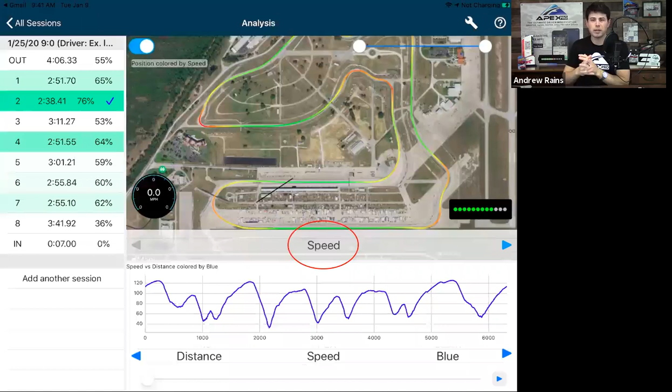But in general, when you're looking at Apex Pro stuff, and this goes for other stuff as well, red is going to be a highly negative value and green is going to be a highly positive value. So it'll go red, orange, yellow to light green to dark green. So basically, the warmer the color, the more negative the value, the cooler the color, the more positive the value. Sometimes we want highly negative numbers too, though, right? What's that? Sometimes we want highly negative numbers. Absolutely. So we'll go back to long G here.

So we're viewing where we're braking, where we're accelerating. And the main thing that we want to do for starters with the speed trace is, depending on the system that you're looking at, this might look a little different, but you definitely want to identify what your axes are. So on the bottom here, we've got distance, and I will change my indication here. So we've got a distance axis right here, starting at the start finish and driving around the track back to the start finish here on the far right.

And then right here on the left side, going from the bottom to the top here is speed. So speed is in miles per hour. In Apex Pro, distance is actually going to be in meters. Most other systems you're looking at, you're going to see distance in feet. So that's a big thing to know. We're probably going to change it to feet. If I have anything to do with it, it'll probably be feet soon, but you might be able to choose. So just stay tuned on that one.

But what we're looking at here is speed versus distance, and that's what creates the shape of this trace that we're looking at. So if the trace is accelerating, if we're going up like right here, speed would be increasing as distance increases, right? If we're going down, speed would be decreasing as distance increases, right? If it's flat, like right here, the speed is going to be relatively the same. So those are just kind of the very critical things to look at first.

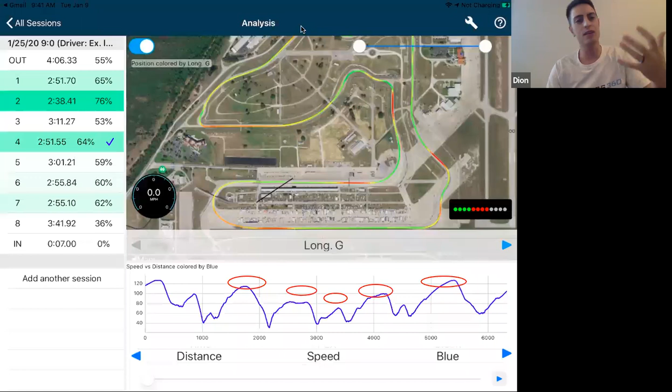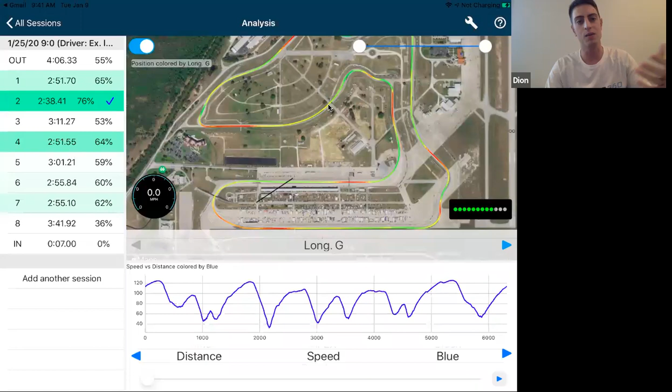I thought it might be helpful. I know Sebring well, but regardless, every time you're out there, you're finding where the track grip is. You're getting yourself up to speed. So, to take turn 7 at Sebring, and for everyone that doesn't know Sebring, that is the really big hairpin here. As you can see, big brake zone, crank it to the right.

I know in the GT3 cars, for the most part, I'm going to be braking about the 4 cone there. But in a car that I don't know, I've got a bit of an unknown. For the most part, we're all pretty decent at saying, hey, this is going to be a conservative brake zone. So my goal is to brake conservatively, but to be aggressive up to that conservative brake zone, brake hard, and then I'm going to be coming off the brakes.

And I might get off the brakes completely before I've even turned in, and I'll coast in. And now I know next lap, I can go a little bit deeper. I can go a little bit deeper.

So what can help in this situation to help you avoid the slowly releasing, where should I be going, is to try to identify by other videos, by curated onboard videos, another driver's lounge thing we do, and other things like that, where's a conservative brake zone? I'm not going to try to go up to my deep points, and this can work for new tracks, and it can work for places you know really well. Yeah. Pick that, hit it. That matters so much more.

We've all heard, like, you always have to be on the brakes or the throttle. That's BS. If you've heard that before, leave it out of your mind. Coasting's okay. We believe in coasting, especially when you've got priorities as a driver, and it puts the priority on the right fundamental, which is avoiding what we're looking at here.

Yeah. So let's just focus on the top of the speed trace. Let's look at another data session and I'll just pick one that I might be familiar with. I might not. Yeah, this will work. So let's look at the top of these. This is my data. This is from a rental car, from an undisclosed rental car company.

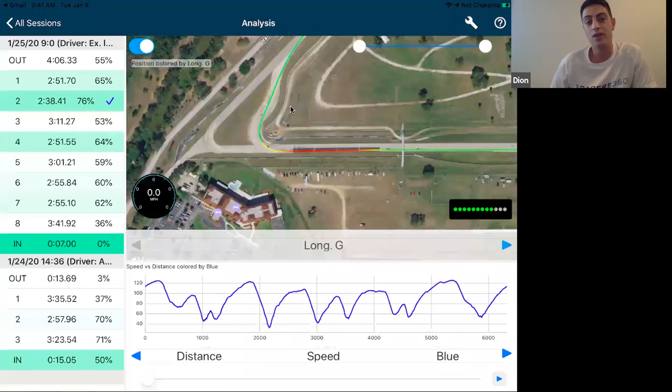Something that looks like that. And a subtle note there, if you also look at the bottom of his speed traces, they're also a little bit more angular than the other drivers. And that's often something we want to see too. Again, that one depends much more on the type of corner, but for the most part, there's a little subtle difference there. That's a nice thing to look at. Yeah, absolutely. And that's a perfect segue because that's where we're going next.

Love it. We did not plan that.

Excellent. Yeah. So for those of you who maybe didn't see what I did with the actual app itself there, I went down to this add another session option right here. And I was able to pick another session from the same track. So now I have this driver's data up here, and then I've got some of my data from my lovely rental car down here. So we can compare 2 different sessions at once, which is going to help us a lot.

But we'll go back up to this lap right here, this 238 lap, and we're going to look at the bottom of the speed trace now. So we got the top figured out. We know what the top of the speed trace is showing us.

Now let's look at the bottom. So like Dion already emphasized, the brake release is really, really key. So there's a bunch of different ways to attack this. I really like to start with a corner that we know is like a hard threshold brake, high speed to low speed style corner. Most tracks have them, almost anywhere.

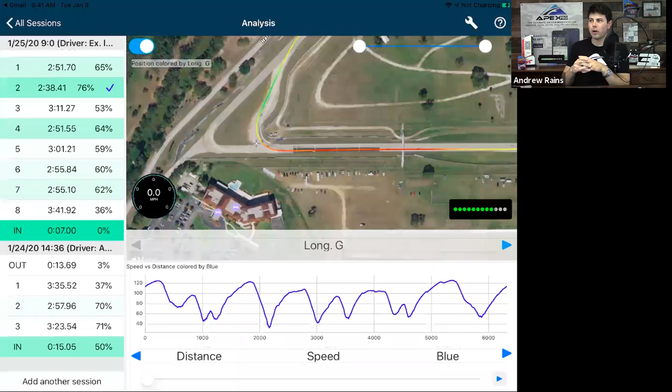If you're just thinking corners off the top of your head, entry to the keyhole at Mid-Ohio, right? Big speed on entry, slowing the car way down. Turn 10A at Road Atlanta, turn 1 at VIR. Those types of corners. And at Sebring, I'm going to look at turn 7. And especially since Dion already mentioned it, we're looking at turn 7.

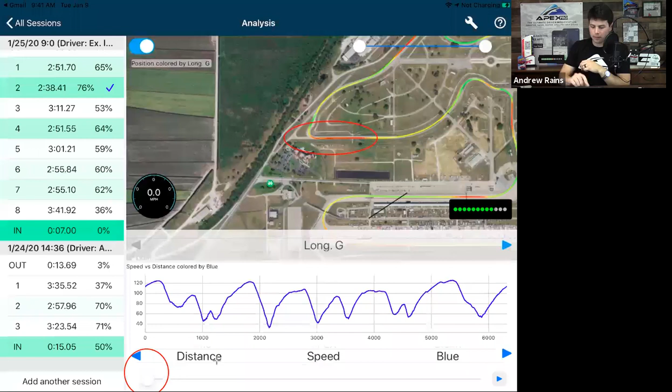So the first thing we want to do is actually determine where we are on the speed trace relative to the track. Especially when we're looking at the bottom, because the bottom is much more corner dependent, like Dion said. There's some general things that are good, but we do need to know where we are on the track to know whether or not this shape is desirable or not. So I'm going to take the slider right here in the bottom left and move it forward until the car gets to turn 7. There we go.

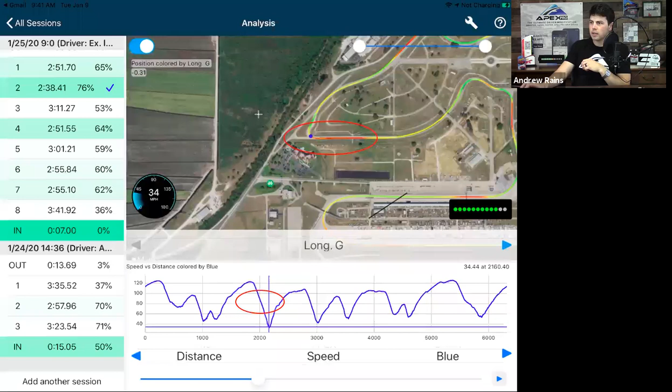Awesome. So now we can see my crosshairs here on the speed trace on the bottom is correlated to my car's location. So now we can kind of just determine that this trough right here, this base of the speed trace, is going to be the apex at turn 7. And this is a really slow corner. We're looking at 34 miles an hour right here at the base of the corner, right? 34 miles per hour is our minimum corner speed for this driver.

What we need to know about the speed trace here is anytime we have a big old gap like this where we're going from high speed to low speed, we want the speed trace to look like a V. For those of you that have been tuned into some of this data discussion before, you've heard a lot about U's and V's. This is titled low-hanging fruit, so that's why we're focused on this. This is the easiest way to identify low-hanging fruit.

If you're looking at this speed trace right here for turn 7, and it looks like a big old U, like that, right, then immediately there's a problem there. You're probably slowing down way too much, way too early. Maybe you're braking all the way down the straightaway. Maybe you got into traffic, and there's all sorts of reasons, but we want to just go to that threshold brake corner and establish what shape it looks like. We're not even saying, hey, could we go faster or not? We're not there yet. We're just going, is the shape the right shape?

And then for other corners on the speed trace that have a similar speed, meaning they're at a similar place on the speed graph. So let's see what that looks like. If you just draw a line, this is 34 miles per hour, right? Where this blue line goes right here, look at the other places that are close to that line, the other valleys or the troughs of the speed trace, and make sure those are V's as well. And if they're not, go ahead and look into that. Why is it not a V? All right, and we can talk a little bit about how to analyze that. But before we do that, let's talk about faster corners.

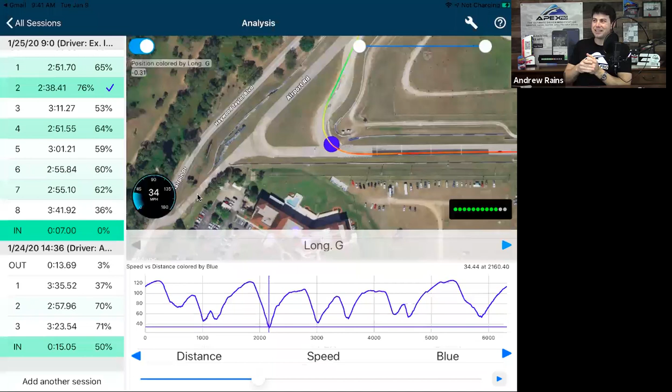And it was funny. I was on one of the webinars that's on the Racers360 platform.

I was actually going through it. One of our coaches, Nelson Mason, did one on how to learn a racetrack. And I think what's really important, where a lot of amateur racers go wrong, and it sounds really simple, but a lot of us don't, is understanding and going through a track and knowing what our priorities are in this corner. And if you look at turn 7, there's really 2 priorities in turn 7.

One, maximizing time on full throttle into the brake zone. And then 2, how early can I get back to full throttle after the apex? If you focus on those 2 things, it's going to naturally form a V. Now, there's subtleties around that. And I feel like by choosing your priority, it's going to customize this a little bit more.

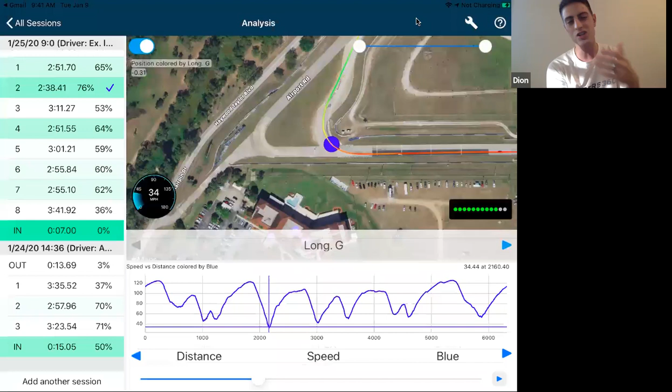So like at Sebring, to expand on what you're talking about before, turn 3 is kind of one of those more medium corners. Now, I think the speeds can be a lot lower than what you're looking at, but that's a corner where I think I want a little bit more of a U shape versus like a turn 7. Or then turn 1 is definitely more of a U shape.

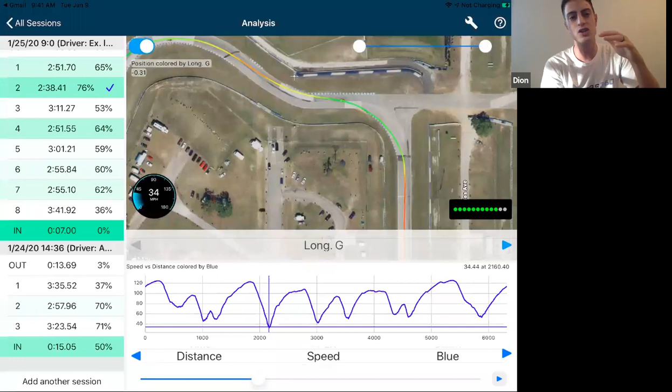And I think turn 1 is actually a really fast corner, but it's one where it's really difficult, like you said, because it's easy to roll in too much entry speed and not pick up the throttle, or vice versa. So I think turn 1 is that right-in-the-middle type of corner that's got a lot of entry speed, where you need to get back to full throttle. It's tough to find that right happy medium.

Yeah, absolutely. Turn 1 at Sebring, for folks that haven't been there, is this corner right here that we're looking at. It's more than 90 degrees, but it's also really high speed. So this driver, you can see turn one is this base of the speed trace right here, high 70s mile per hour minimum speed. Let's look at the rental car speed here, right? Actually a little bit quicker, almost 80 miles an hour right through here. I think my minimum speed was like 76 or 78 miles per hour.

And Dion, what's funny about you mentioning that, if you go to the very next lap here, you'll notice that I actually went 4 off right here at the exit of 1 through the dirt in the rental car. More time. That's right. I emphasized entry speed too much. And you can see where my minimum speed here was really good. It was really high, right?

It was higher than the lap before. If I overlay the two of them, it was actually higher than the lap before, just subtly. But then I wasn't able to get to the throttle because I was trying to gather the car up on the exit. So it's all about priority. So turn one's a great example of a fast corner.

And we'll go back to just a single lap being displayed here and talk about the shape of a faster corner. And I noticed in the comments, some folks were mentioning throttle and brake trace and stuff like that. And that's going to tell you a lot more information. But what I'll challenge you with is a quote that I think was from Spider-Man: with great power comes great responsibility.

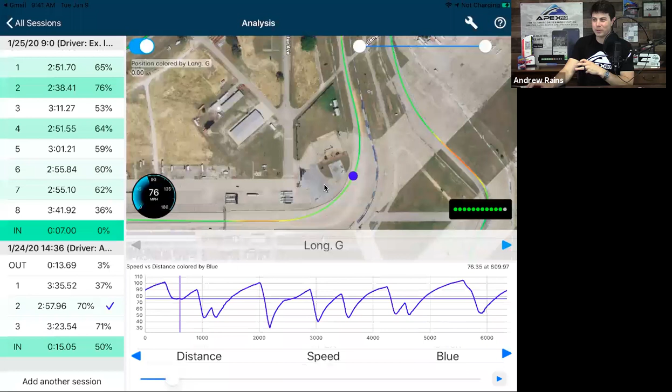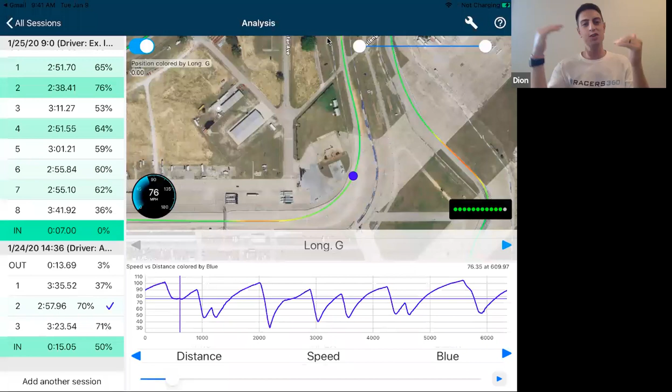If you go into a really fast corner and brake hard and late and carry all that weight over the nose, when you go to ask the car to turn, it's going to be really eager to turn in most situations. And that can spell trouble. If you carry a lot of brake pressure into turn one at Sebring and you braked really late and stuffed all that weight over the nose, you can definitely point the car right at the inside wall. And just to hopefully not complicate things, as with anything in this sport, there's happy mediums, right?

The other thing that we see a lot, and is very typical in amateur racing that we like to avoid at almost any cost, is like a flat bottom on the slope of that line. In a corner like this, you don't want a V, but you also never want to see a flat bottom once you're comfortable. I mean, look, when I go out for Sebring turn one the first time, I'm going to have a flat bottom because I'm getting up to speed. But on your fast laps, you always want a nice kind of slow, and then it should almost immediately start ticking up again. We want to avoid that kind of maintenance.

And this one, I just pointed out because I saw a little bit of that. And of course, hope that wasn't you in the rental car first lap, but it's something that we see quite a lot. Yeah, no, this is exactly what was going on here. So obviously it looks more like a U than a V, so that's good. But what I was doing here is I was actually turning in really early. And I noticed that from data I have mentally from the track, but also if I go and look at my track map reference and where I actually need to be turning in, I just wasn't calibrated to the track.

And so I ended up coasting for longer than I really needed to in the middle of the corner, because evidenced by the very next lap, if I turned in the same place with more speed, I was going to run off the track, and I did. So I actually ended up adjusting my turn-in point, and everything was better. And then my speed trace started to look more like a U. So think about those fast corners. That's a really good example.

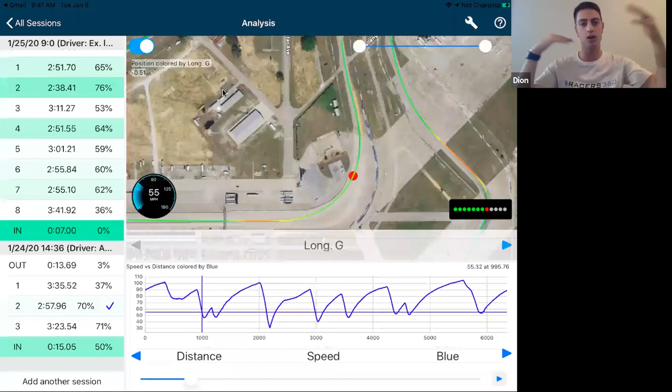So the next thing that we're going to look at is some data that I sent, and it's from Barber Motorsports Park. So you can either search for Barber, or you can look at the track selection here if you're in your app, if you've already uploaded the data into your app. If you haven't, then go to find this file. It's going to be called example 2. Look at longitudinal G. This file right here that my mouse is over, right there. And so we're going to tap that, and we're going to look at longitudinal G forces for this one.

We're going to depart from the speed trace briefly, and we're going to talk about what is longitudinal G and what are we looking for specifically in our data to note what we're doing right, what we're doing incorrectly. And longitudinal G is going to be really, really representative of our braking habits. And I say habits because driving is the type of thing, and the reason that Racers360 exists, the reason Apex Pro exists, is because it's a coaching opportunity, right? These are not things we can go out and fix immediately. So we're going to be looking at some habits here.

And this particular driver has a pretty bad habit that we want to make sure that we identify and get rid of. So we've already got long G displayed on the track map on the top here with our channel selector. Let's also go down here to this middle selection where we see speed and pick longitudinal G as well. So that's going to change the shape drastically of this trace that we see down here, this graph. Same measurement down here. We have distance over the course of the track, 1,000, 2,000, 3,000 meters. But now going up the y-axis here, we have longitudinal G-forces.

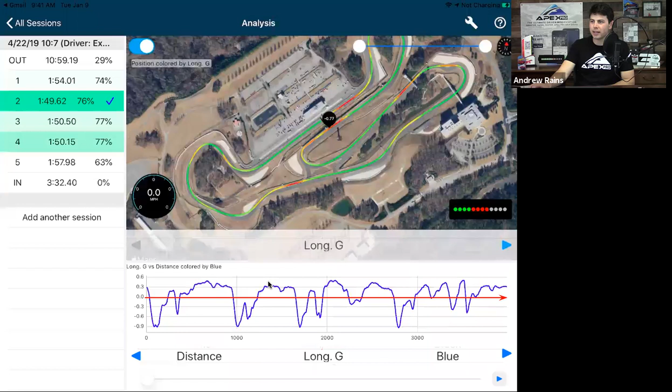Did we get an answer on that one? Someone guessed coasting. All right, not quite. Let's wait for another one. We're not going to give it away. This is not the speed trace. The next answer we got was maintenance. That technically can be, but I don't think that's really what we're looking at here either. Nope. If we're trying to identify, I'll give a little bit more information, where on the racetrack is this flat part of the longitudinal G trace, what would the driver be doing? No. So I'll tell you what I'm thinking. Not riding the rev limiter either.

So when you get close to the top speed of the car, your acceleration is dying down. So I'd say that driver is still probably flat out, but it's not accelerating as hard. Yep. So you see it come closer to zero. Yeah, absolutely. So we have to take a switch in our brain and flip it from speed to G-forces, which are two different things. G-forces represent acceleration. Speed represents the speed the car is traveling. So as speed increases, acceleration decreases.

There might be a few exceptions to that, especially with boost by gear on modern hypercars, supercars. McLaren does it. They actually add torque as the gear increases. So there's more torque in second than first, more torque in third. And some of those cars actually accelerate harder in a higher gear. I can tell you right now, this is a Camaro. This isn't a McLaren. So that's not the case. Anytime we see this flat line, that's usually wide open throttle. And you can usually identify that because you'll see an increase and then you'll see it kind of flatten at the top and then you'll see a decrease.

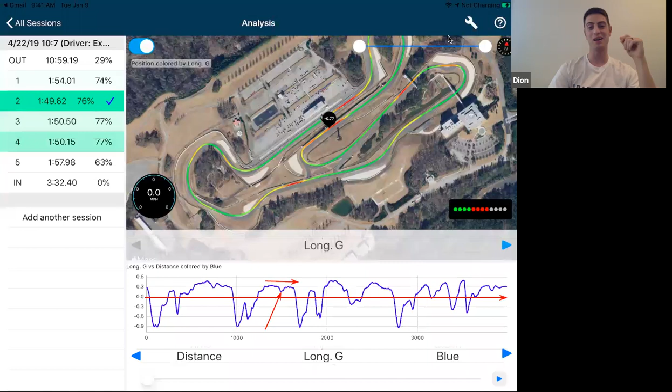We'll also sometimes see these little divots right here, right? I see one right there. I see one right there. They look kind of similar. Maybe I see one right there that looks a little similar. Let's make that another question. What are these divots? That's the best word I can come up with. Oh, did we get one? They're on it. Gear change, shifting. Nailed it.

Nailed it. Awesome. And that's easy to look at in the longitudinal G trace, because I like to actually physically look through the trace and put my body through what the car's going through. So if I'm looking at one of those divots, I'm wide open throttle. The weight's kind of mostly rearward, but it's pretty neutral. And when I shift, I go boom, right? Especially with 3 pedals and a stick shift. Even in most shiftable automatic transmissions, you're going to see that in your longitudinal G trace.

Some dual clutch transmissions, if you're driving a Ferrari or a PDK Porsche, that's going to be much less significant. It might not even be visible in the longitudinal G trace. It's definitely not visible in the speed trace.

So now that we have our flip switched in our brain for G's as opposed to speed, this should make this process simpler. So again, I'm going to go to a corner on the track, and it's going to be turn 5 for those of you that are familiar with Barber. For those of you not familiar with Barber, think any high-speed to low-speed threshold braking corner.

So we just talked about turn 7 at Sebring, Dion. We just talked about 10A at Road Atlanta, the keyhole, entry to the keyhole, which would be turn 2 at Mid-Ohio if you're on the pro course. Turn 1 at Watkins Glen is going to be a pretty hard brake. Anywhere that's like, throwing the weight over the nose, toss the anchor out the rear to slow the car down, deploy the parachute, whatever it is. That's what we want to look at here.

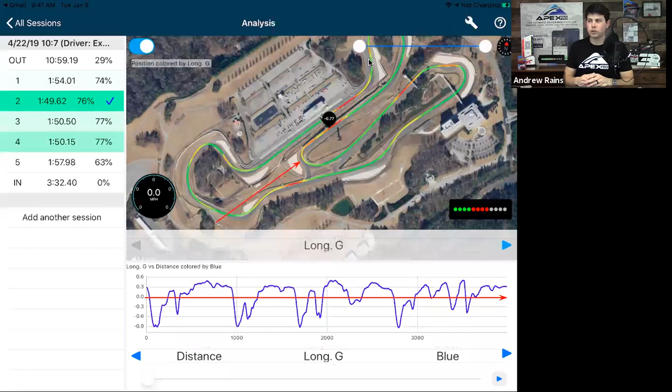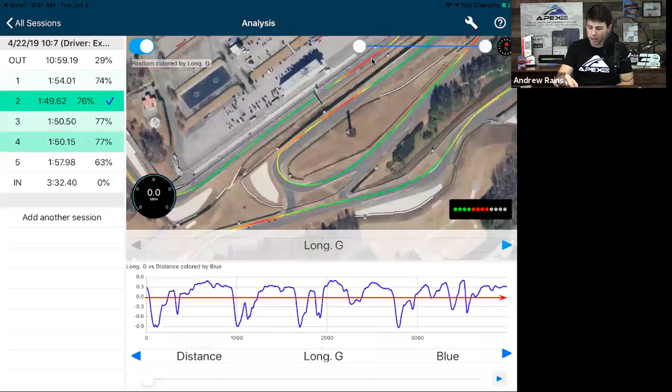And this is the first thing that, if you're especially using the Apex Pro app, I find this extremely easy to diagnose. I'm going to dive right into here. And again, I'll reiterate the colors. Red is going to be hard deceleration. Green is acceleration. So therefore, orange is a little bit less deceleration. Yellow is going to be neutral or close to 0. And then green is positive.

Does anyone want to guess, because I think this is a lot of fun, and I hope y'all are learning from this, but does anyone want to guess what this blip is right here? Let me put a different color on here so it makes a little bit more sense. What I want you to help me identify is this change in color that we see right here. Hard braking, then we see this yellow, and then we see braking again. What's that driver doing with their right foot?

So we've got an off the brake. We've got a Malik's moment. We've got a blip shift. By blip shift, I think is what Bill meant. Yep. Downshift, heel toe shifting. Nailed it. All the above. Those can all be correct in this situation. Just from looking at a lot of data, I'll tell you most of the time your downshifts, you don't need to see an adjustment in longitudinal G that's this dramatic. So what I'm going to do, and this is going to be interface specific, I'm going to zoom in and then I'm going to tap the darkest part of the lap right here.

And sorry, just to jump in there really quick, because it's just ironic. This driver, I'm going to guess, is heel toe shifting in here, I think it is. It's just a really dramatic lift off the brake pedal. Yeah. I always have my coach hat on. It's hard to take it off, but it's something we want to avoid. That's something that I actually struggled with early in my career, was how do you get the right foot angle to be more consistent on the brakes?

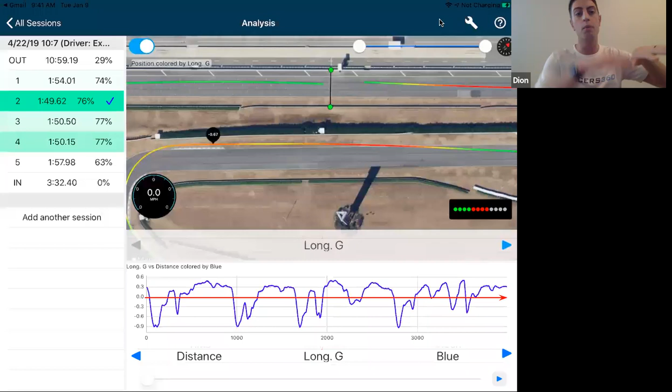So for instance, if this driver was really new, I would look at the initial brake application and wouldn't really worry about the next part of it. Yes, it's not perfect, but there's priorities that we want to fix. Or if they're an experienced driver and we're working on the next bit, which is where you're starting to apply the throttle, how you're turning, entry speed or speed through the brake zone, then this becomes an issue.

So one important thing to know in the back of your mind: if you hear someone saying, hey, this is just what you have to do everywhere, run and hide. That's not the person you want to listen to. There's always degrees of change. Everything changes in the sport. So it's important for us to have priorities, but just know there's never going to be a one size fits all solution. It depends a lot on where you are in your driving, type of corner, the conditions.

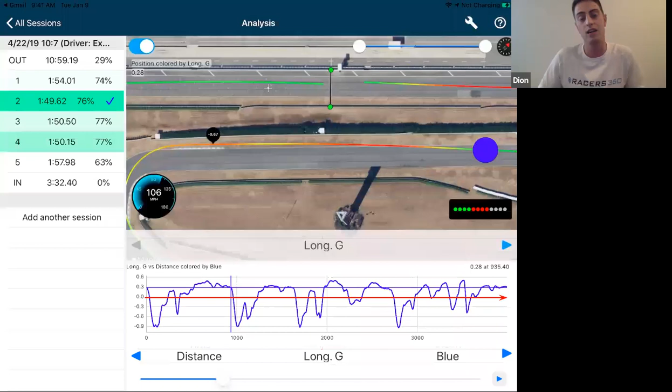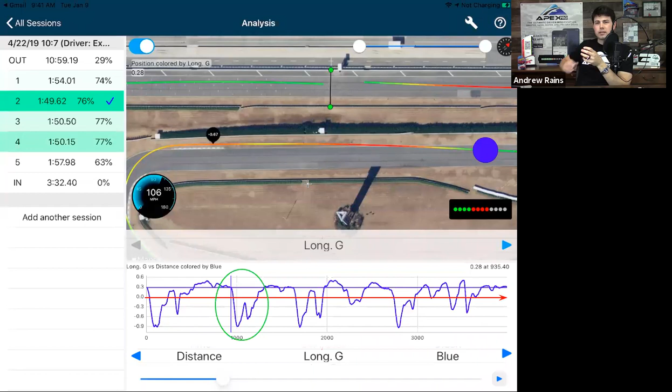Absolutely. Everything has to be applied to your specific situation because we all learn a little differently. The stuff we're talking about now is not going to be universal in how you apply the fixes to your driving, what you actually tactically go do in the car. But what we're looking at here is fairly universal as far as is this good or bad, right? And this is bad. And we know that. And as long as we know that, that's what we're trying to get out of data, right?

We're not asking the data to tell us what to do yet, right? We're just trying to get something out of it. So I've done a couple things here. And real quick, I saw a question in the comments. Someone said the driver's off track. Yeah, they were braking in the grass. That's why they had to lift.

No, this is just GPS overlaid on the track. For those of you that are familiar with other systems, you're going to see the same issue. The way GPS works, without digressing too much, is there's satellites obviously orbiting the Earth. We're not only using satellites launched by the U.S., but also Russia and China. So have you ever heard of GLONASS? GLONASS is just Russian GPS satellites. It stands for something else. It's not Global Positioning System.

When the GPS shift occurs, basically when we're using 7 satellites, call it, when we have to shift and use a different satellite because one of those satellites dips beyond the horizon, this is what happens. And it's almost universal. It doesn't even help if you have a higher end, higher frequency GPS. The only way you can correct this is by having a base station on the ground. So IndyCar teams, IMSA teams, a lot of times will run a GPS base station off of their hauler to do ground corrections on their GPS.

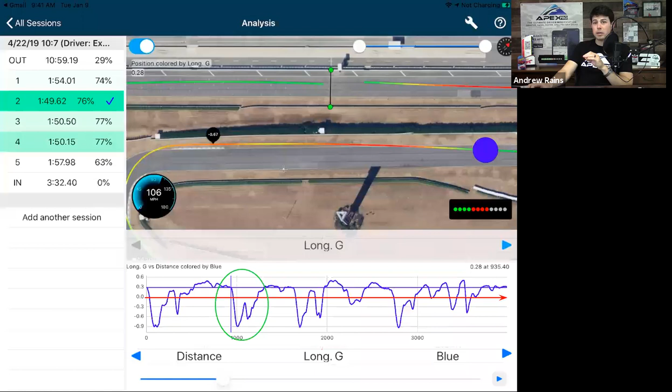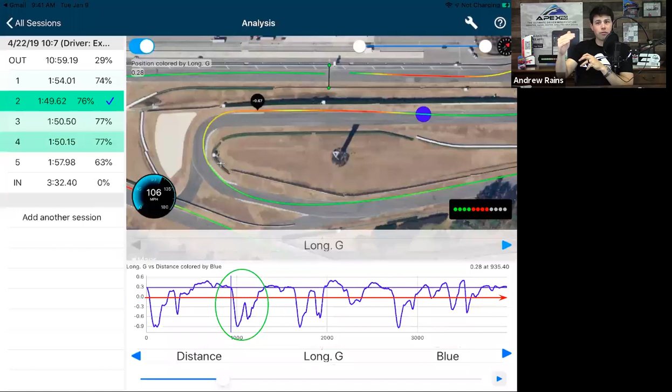So even if you run a roof mounted GPS, it's going to be a little more precise, but you're still going to see this. And what you'll notice is that the whole track basically has been shifted in this direction just slightly. So if you're looking at this line to go, hey, where was I exactly on the racetrack? It's going to be a little shifted. A lot of times it will actually be really, really close, but in this case, it's just shifted slightly to where the car's just in the grass right here. So we can assume he was probably just inside of the white line. I'll get back into it.

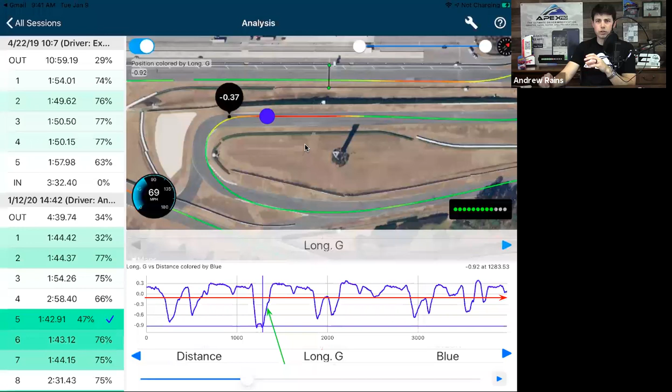But I want to let everyone who's involved guide the conversation. We have one more example to look at if we want to, and it's about the friction circle, or the GG plot, traction circle, XY plot. There's a lot of different names for it. We don't necessarily have to go there. We can go straight into Q&A if we want to.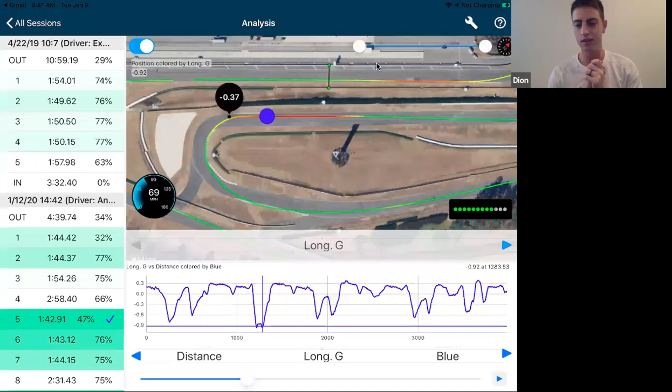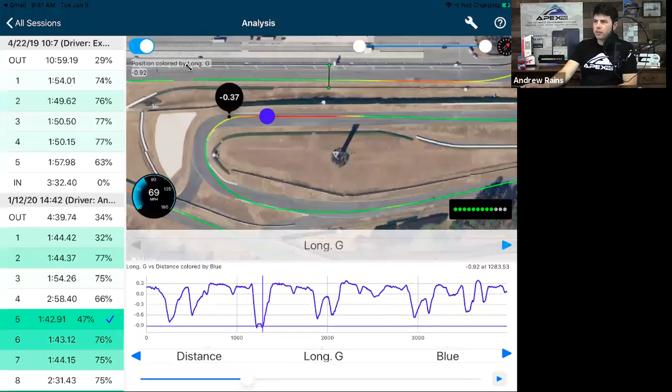Cool. We'll hop into the friction circle. So this was also a data session that was sent out in the email, and it was also from Sebring. So I'm going to go back into Sebring. If you uploaded this data into the app, you'll see... oh, let me get my annotation tool back here. Started dragging the screen around. You'll see example 3 friction circle is the name of the session. It was recorded on 1/26 of 2020 at 8:24 a.m. So if you're looking for it right now, that's how you can find it.

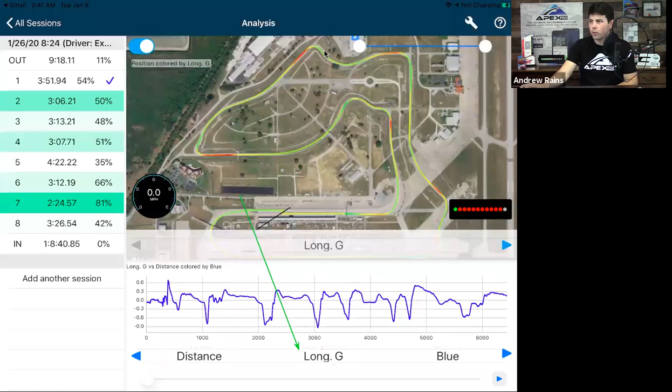And this is a really great example of a good example and a bad example of a friction circle. And we'll talk about first, what is the friction circle? What in the world is it? What does it mean? And what can we learn from it? So I'm going to hop right in here. I'm going to tap this data file and get started.

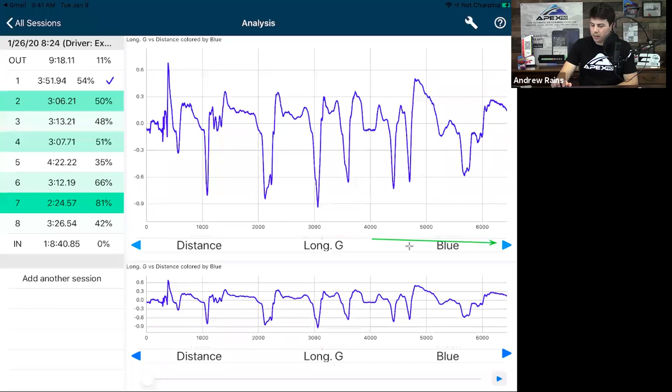So you'll notice in the app, it's going to save our last view. So we were looking at long G and long G. That view is going to be retained. So when we open the app, we're seeing the same exact points that we had established before.

Now to view the friction circle, we're going to go to this arrow on the right side of the screen, and I'm going to tap that arrow. We'll get to our second page here, and then our third page is going to be the friction circle. So we're looking for this graph right here, this plot. It's going to be a lot of little data points plotted on just an XY graph. Same plotting method as down here, but it's going to be showing us something totally different.

Now, what's interesting about the friction circle is this concept hasn't been around for a super long time. It was actually pioneered in the late 60s. Mark Donohue coined this term and was the first person to really measure accelerations and put it on an XY plot like this to look at the potential of the car, or where the limit of the tire is. So the whole idea with the friction circle is to help us understand the tire, how much acceleration the car can withstand.

And just like the speed trace and the long G trace, it's pretty straightforward to look at once we know what we're looking at. And just the shape of it, or the concentration of the plots, can tell us a lot. So we'll jump right in if that's making any sense whatsoever.

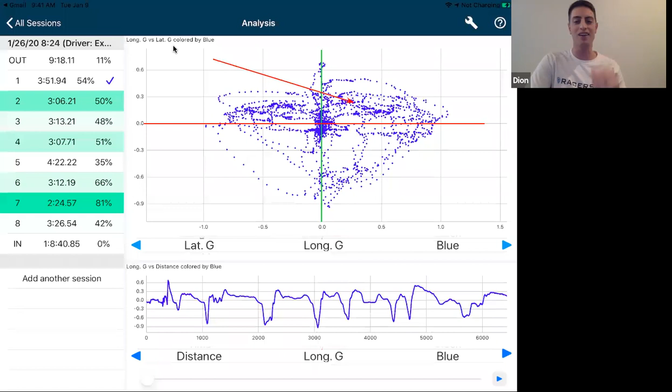Have anything yet? Right acceleration, accelerating to the right. Yep, but I'm looking for two different things. Which direction? And are we on the gas pedal or the brake pedal?

Oh, Dion, I think you're muted. My bad. That was you. We're getting a couple answers here already.

Gas to the right acceleration.

There we go. John, hey, John, what's up? I know John. I hope your new track car build is going well, John.

Very cool. Right acceleration on the gas.

Martin, I know Martin as well.

Good stuff. All right. Yes, those were all correct. One second here, I just got my annotations all messed up on the screen. Okay, so if we're looking at dots in this upper right quadrant, we're turning the steering wheel to the right, and we're on the right pedal, the gas pedal. That's what plots dots here.

So if we're turning to the right and we're on the brake pedal, that plots dots down here. Same thing over here, turning to the left on the gas pedal, turning to the left on the brake pedal. Hopefully that makes sense. That's kind of the baseline understanding that we need to go into this. I'm going to leave the axes right here.

So what we're looking at now is going to be the shape. The shape itself, like the outline of the friction circle, is very important, but so is the center, the concentration of these plots. We see all these dots plotted around 0.2, 0.3 positive. That's very important to remember when we're looking at this. There's a lot of dots right there.

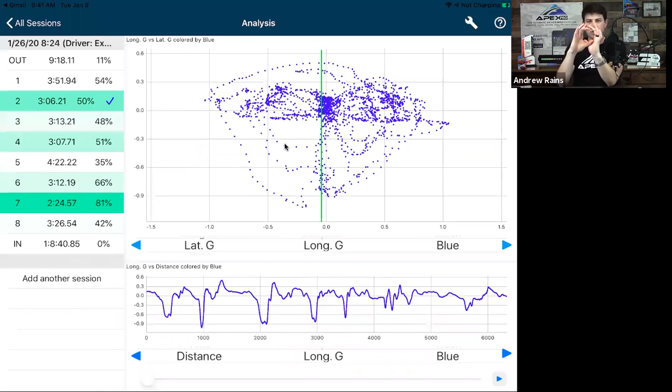There is zero confidence. There's a lot of coasting, a lot of hesitancy with the throttle. And I see very few dots plotted along the outside edge of the friction circle, very low concentration. The shape of the friction circle I mentioned before was also very important, and we want it to have a pear shape.

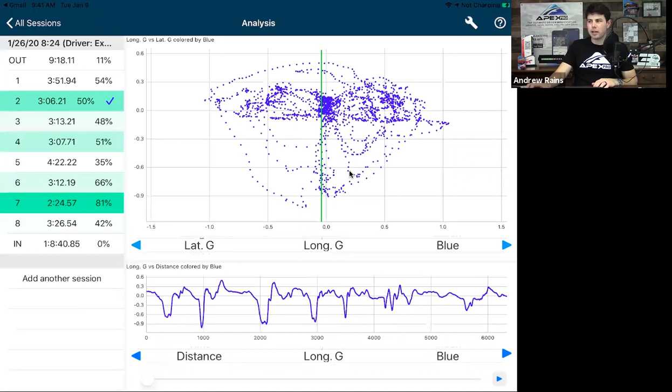We want it to basically have this type of shape where it's expanding a little bit at the top and at peak lateral G, and it starts to get more concave as we get closer to our peak deceleration, which is down here. But we want it to bow out as well.

If you've ever watched those videos where you see the little circle with some smaller circles in it, maybe crosshairs, and a little dot bouncing around, that's exactly what we're looking at here. A lot of people put that in their video overlays on YouTube. All of your YouTube track day warriors with their little G dot bouncing around, that's plotting the friction circle.

So really quickly, I'm going to toggle this bottom one back to the speed trace. This is at Sebring again. I'm going to tap the play button in the bottom right corner, and I'm going to change the color as well. That's going to show us a blue dot, and where that blue dot is on the friction circle and where it is on the speed trace.

So I can start to learn not only where on the track this is, but at what speeds is the car accelerating in a certain direction, all right? So right now we're accelerating, turning to the left. This is exiting turn 1. Now we're accelerating straight. We're heading towards turn 3.

We're kind of coasting. We're coasting. And now we're going to be braking really hard right now. See how the dot went south, went really steeply down? That's braking. Now, when we're way out here, that's actually evidence of trail braking. That's showing us combined G, meaning we're decelerating and we're cornering pretty aggressively.

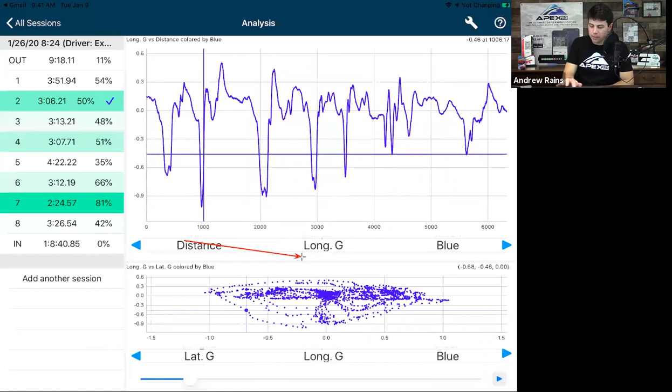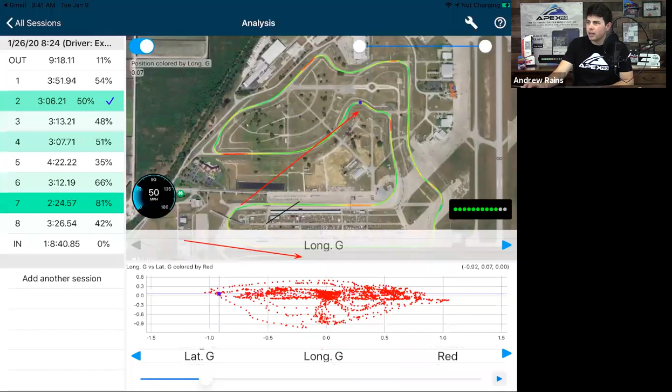If you look in the top right, you'll see the exact values. You'll see negative 0.68 and negative 0.46. So the first value is going to be lateral G, so that's going to be cornering force. So negative 0.68 is going to be lateral G to the left, and then negative 0.46 is going to be longitudinal G, deceleration. So that's going to be your combined G forces. I find this to be the simplest way.

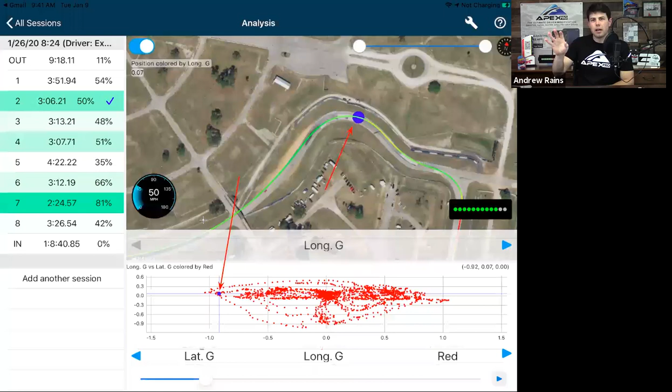Another way that we could do this even simpler is if I go to the friction circle on my bottom screen down here, and if I go to the track map on my top screen, and I press that same play button. All right, now we can watch the position of the car on the map as well as the dot on the friction circle. And we can see what corners plot certain acceleration.

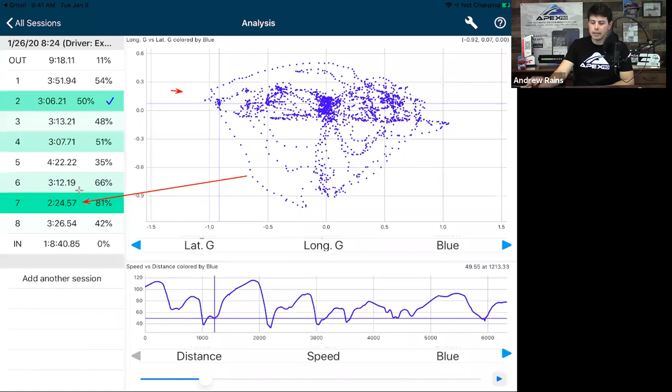So right now we're in this left-hand corner. The car is turning to the left. Look at that dot. It's on the far left side of the friction circle. Hopefully that's all starting to piece together what we're looking at. Let's look at a good example of what the friction circle looks like, because I don't want to beat into your head a bad example, but I think it's important to be able to note the difference between a good and a bad one.

So let's remember, lots of dots in the middle. That's going to represent coasting, not accelerating hard. Very small concentration of dots on the outside means the driver's spending very little time at the limit of the tire. All right. If I go to select this lap, the first 1, 2, 3, 4, 5, or 6 laps. This last lap down here was a pro coach, and he set a baseline, and his friction circle is going to look very different.

All right. Now we're looking at this 224 lap. Does everybody see the difference here? Let's just do that one more time. Look at all these dots in the middle. I'm going to leave my arrow there. Look at that. This driver's almost plotting no dots at positive 0.2 longitudinal G acceleration. But the edges are so different, right? There's way more along the outside edges.

So if you're looking at your data and wondering, what is this that I see? Just go and look at the concentration of dots. Are there a lot concentrated in the middle, or are they spread around the edges? If they're in the middle, you immediately know that you're probably spending too much time at partial throttle or partial brake. You're not spending enough time actually at the limit of the tire.

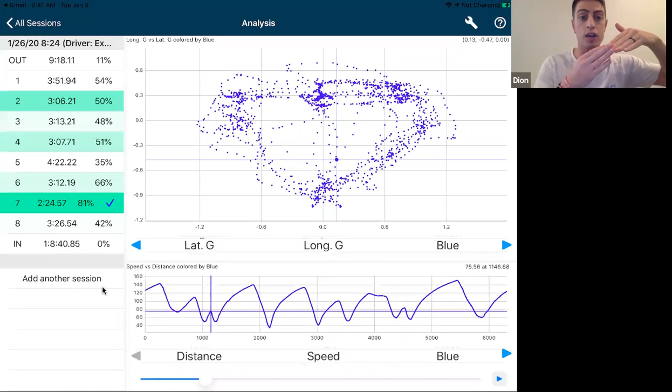So essentially trail braking is all about using the weight transfer of the car effectively. Trail braking is the release of the brakes so that at the turn-in point, we're still on the brakes. But really effective trail braking is where, for the most part, your big toe is just resting on the brake pedal. And for me, it's more of a keep weight on the front end rather than trying to slow the car down.

By keeping the weight on the front end, you're getting rotation. Now, rotation and oversteer are the same thing, but oftentimes we talk about oversteer as a negative and rotation as positive. So I use the word rotation. Yes, you do want a little bit of yaw in the car. So that weight on the front helps the rotation. It allows you to start to unwind the steering wheel sooner or more aggressively at the exit so you can get back to full throttle earlier.

So what trail braking does is it manipulates the weight of the car to allow you to roll more entry speed while also getting back to full throttle earlier. Now, there's a lot beyond that. How aggressive do you trail brake? What corners do you trail brake on? Conditions. Like I said, we could talk for days.

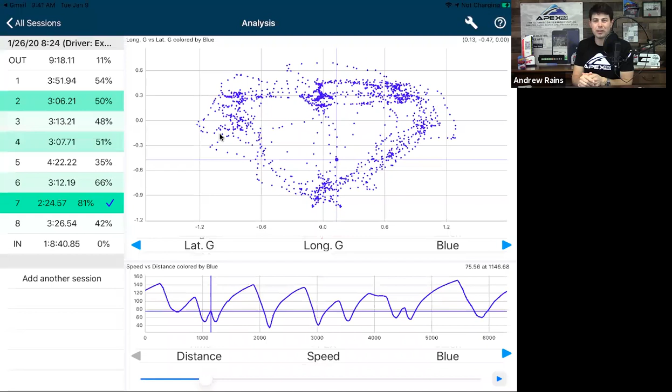So this next question from Track PC is, how do you use data on a track you don't know? I think a lot of what we talked about today would be a good example of that: how the slopes of the lines are on the top of your curves, on the bottom of your curves. One thing I look at heavily is where am I picking up initial throttle, making sure it's coming exactly where it should be. A lot of what we covered today works really well on tracks that we don't know yet. Yeah, absolutely. I would say rewatch the webinar.

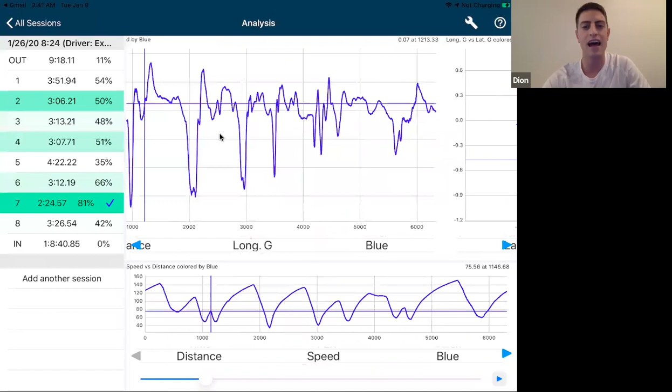100%. Knowing what the top of the speed trace means, knowing what the bottom of the speed trace means. The thing you're going to have to research a little more is whether this is a faster or a slower corner, and whether this is the type of corner where you want a V shape in your speed trace or a U shape. But being able to look at the app and any data just like we did, if you see that double brake application, if you see that U speed trace on a slower corner, you don't have to know the track.

Honestly, I look at a lot of drivers' data that I've never been to the racetrack before, and I can immediately look at some stuff and speak relatively intelligently on it just because I know how to look at the data. And then I can kind of go in and do a little research on the track, watch some videos, and hopefully drive it, because you're really not complete until you drive it to understand it more completely.

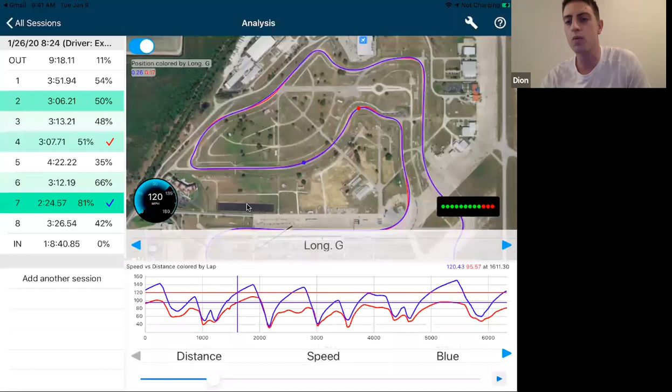Absolutely. All righty. So Martin, is the next question here. When you have two dots racing around the screen in the satellite view, the LED displayed, what car is it indicating? Sure. How's it going, Martin? So when you're talking about this screen right here, satellite screen, which is this top screen, we've got two cars overlaid, so 2 laps. So I've got a blue check mark and a red check mark. So we see 2 laps.

Both the speedometer, which is here on the left side of the screen, and the Apex Pro light display are going to be showing what the blue dot was experiencing. So those references, the speed, and the apex lights are going to be associated with the blue dot.

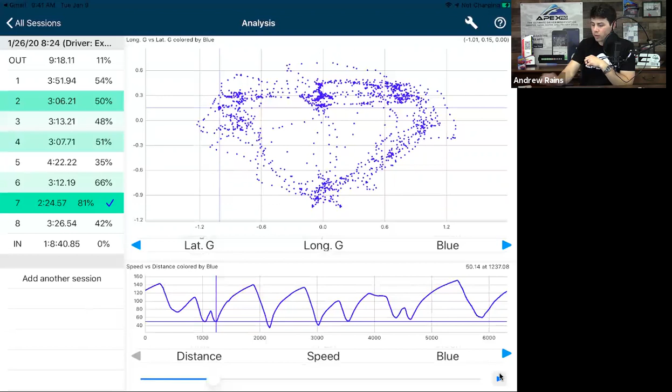Cool. Awesome. So far, it looks like the last question might be here from Eric. What's good to quickly review between runs at an autocross? Ooh, good question, Eric. I would go to the friction circle. I'd spend a lot of time learning exactly what you're looking at here, because on the autocross, a lot of times when you're staging between runs, so say you go out and you do a run, you come back in, you get your time. A lot of times you file back into the run line again, depending on how your club does it. So you might only have a couple minutes. You might not even be able to take your helmet off.

I would go in and look at the shape of this friction circle. If you struggle with underdriving the car a little bit, not quite knowing if you're at the limit of the tire, I would definitely go here. Look for those concentration of dots, same exact thing as a road course. You want to see the concentration of dots on the outside of the friction circle, less dots in the middle. That's immediately what I would look at pretty quickly.

I would also go in and replay the Apex Pro LED display over the lap and look for corners where you're seeing a lot of red lights. We didn't get into what the lights mean, but basically those lights are showing you what that friction circle display is showing you, but they're going to be modified for the conditions of the track based on the accelerations that you've already shown the device, and it's learned some of those data points.

So those are the two things I would do: friction circle, and then go back and hit this play button down here in the bottom right corner and replay the position of the car on the course, and watch this guy right here, the light bar.

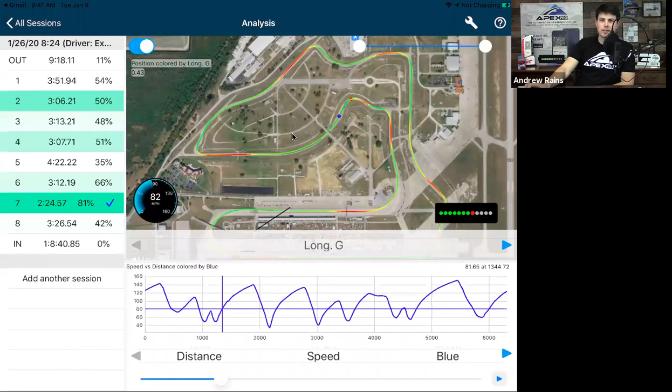Awesome. If no one else has any questions, we'll leave it open here for just a little bit longer. Hopefully, if you have a question, you can ask it really quick. If not, I think we're ready to wrap this up. Looks like we're good to go.